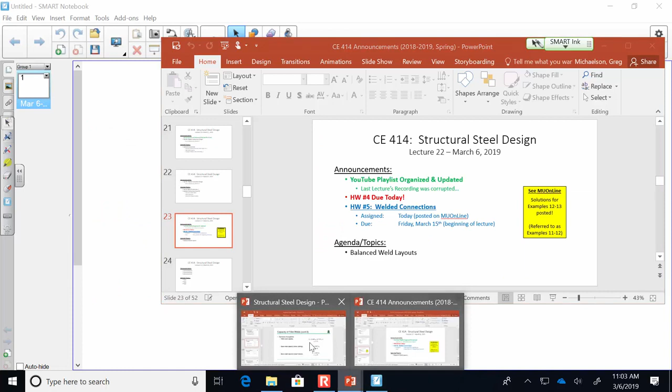Yeah, I know. Seriously, was everybody okay with last time? Did anybody have any questions? Everybody good? Okay, if you got any questions, please raise your hand. Don't be shy, I will be happy to address them.

So last time we started to, let me go back a few slides... here's a good place. All right, so we started to dig into the spec a little bit in regards to how to determine the capacity of a fillet weld. And we had gone through all of the math associated with the weld metal, the base metal. We had gone through defining the ultimate capacity of a connection according to the weld metal capacity.

So we said, all right, the phi value is 0.75. The material strength is 0.6 times the electrode capacity. And then the area is the length of the weld times the effective throat, so 0.707 times A, from just sine and cosine of 45 degrees. So the capacity was pretty straightforward.

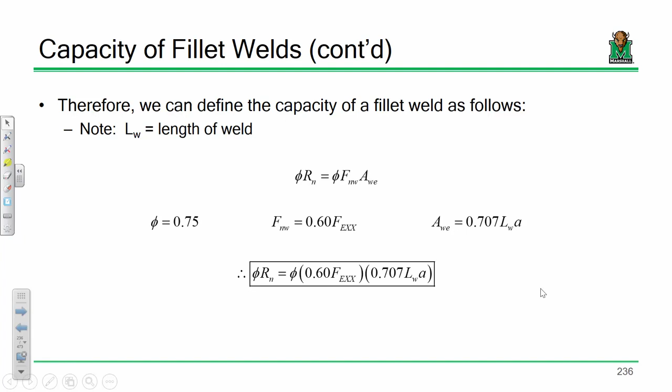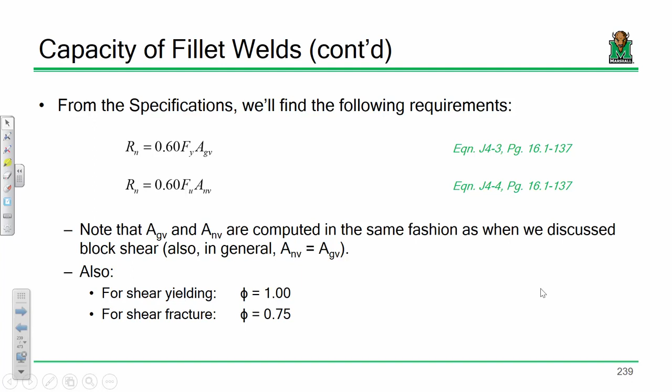The base metal, you end up going off of section J4, specifically J4-2, because we're assuming everything is in shear. So our capacity is just 0.6 Fy AGV and 0.6 FU Anv. It's very similar to the block shear computations. And remember, because we're talking about a welded connection and not a bolted connection, since we're not drilling holes or anything, the net area in shear equals the gross area in shear. We have our phi values listed, pretty straightforward.

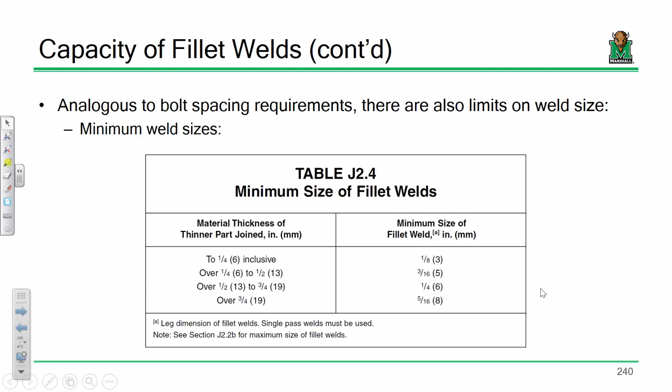We do have minimum and maximum weld sizes, for similar but different reasons than for bolted connections. For welded connections, we're worried about two things. We're worried about the heat sink phenomenon. So we have a minimum size of welds listed because if the weld gets too small, if you have a super thick plate and a really tiny weld, you get that heat sink phenomenon, where the plate absorbs the heat really rapidly, and you get a rapidly cooled weld.

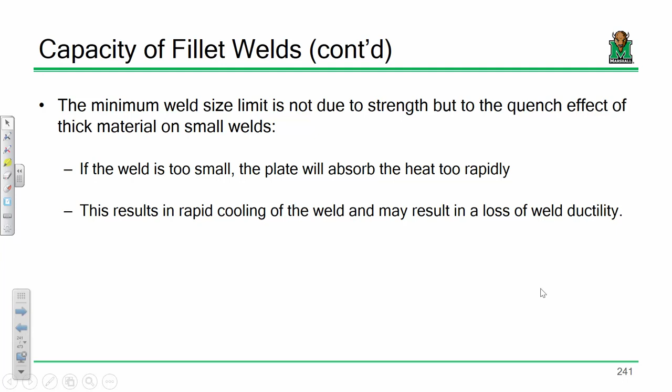It gets pretty brittle, and it doesn't behave properly, so we have a minimum weld size limit for that heat sink phenomenon. The maximum weld size limit is essentially to maintain this — if you have what I'd call a regular plate, the maximum weld size is usually backed off 1/16 of an inch, because we want to avoid melting that corner tip of the plate as we're placing the weld.

Now, if we have a really thin plate, something less than 1/4 inch thick, don't worry about it—go ahead and melt it. It's not really going to matter anyways. So that's our reasoning for weld limits.

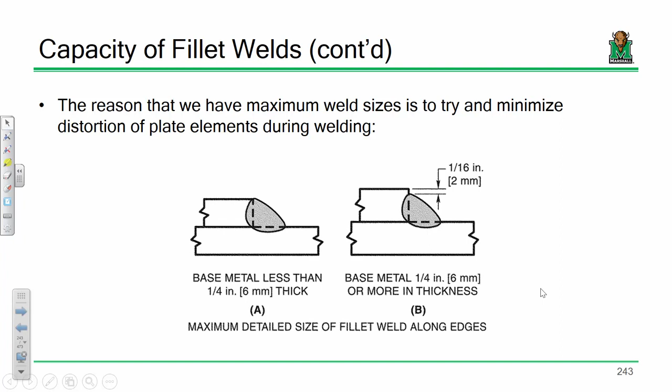Minimums are to prevent the heat sink phenomenon, and maximums are to maintain the geometry of the plate—make sure it remains a rectangular plate. I did mention weld limits on length, but that's usually not an issue for most of the welds we're placing.

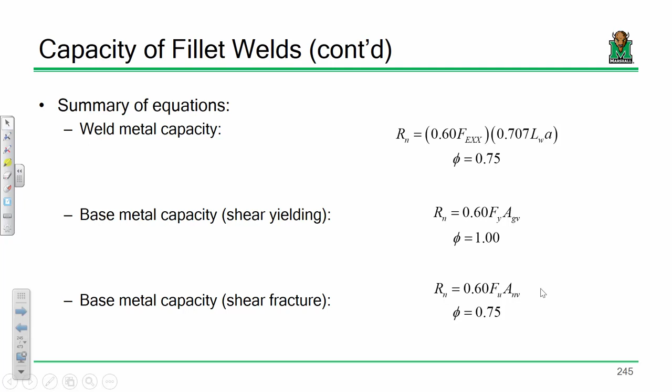So we got this very concise summary of equations: this is the weld metal capacity, base metal shear yielding, base metal shear fracture. We have our minimum weld sizes that we look up, and our maximum weld size is either the thickness or the thickness minus the 16th. Most times it's going to be the thickness minus the 16th.

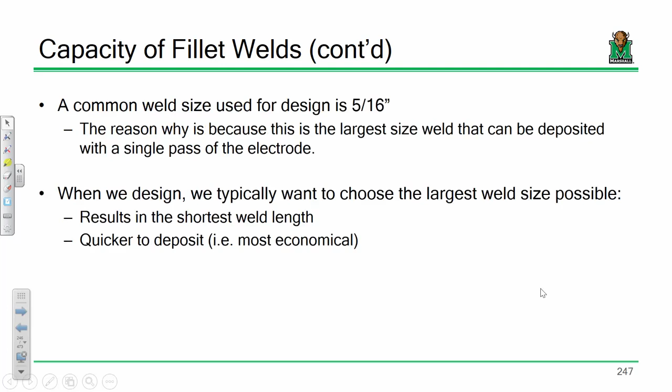We did two examples: one was an analysis example and one was a design example. In the design process, it's pretty straightforward—you just determine the capacity of an inch of weld and divide the load by it to determine the total number of inches.

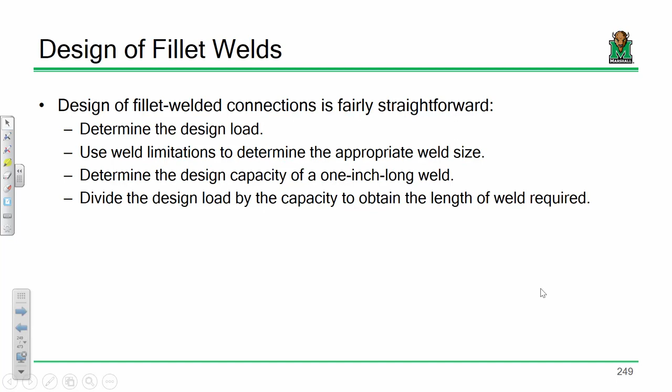That's basically it. The only other thing is that usually in design mode you have to determine your weld size, and more often than not you want to choose the maximum weld size. Maximum weld size means shortest weld length, so that's typically the most economical. When choosing a weld size, you usually want the biggest one you can, but you don't want to go over 5/16.

The reason is 5/16 is about the largest weld size you can place with a single pass of your electrode. Now, if you've got a lot of load and need a bigger weld, then you just need a bigger weld. But usually we can get by with 5/16 or less, depending on your weld limits. So 5/16 is a very common weld size because of that.

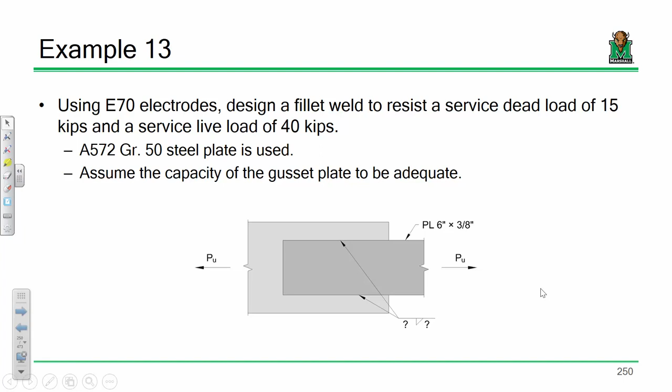Okay, now this was the example we did last time. When we did the math, we ended up solving for a weld length of something like 11.8 inches. Was it something like that? Is that what we got? I don't remember—what was the number?

11.78, so we rounded it up to 12 inches, and what we did is said, well, this is a plate, so let's just put 6 inches up here, 6 inches down here, let's call it a day. I think that made sense—if you've got 12 inches, just do half and half.

But why? Why would we split it up half and half? Why don't we just put 12 inches up top and nothing down below? Is there any reason not to? Well, yeah, there is a reason not to.

The reason is, think of it like a beam. I'm yanking on this plate with—what was the force on this problem? It was like 80-something, because there was a dead load and a live load. We factored it—what did we get? 82 kips. So I'm placing 82,000 pounds on this plate.

The analogy I think of is this: imagine I've got 82,000 pounds sitting in the middle of this table—half of it goes here and half goes here, right? So wouldn't it make sense that if I'm placing weld, I'd place half my weld over here and half over here?

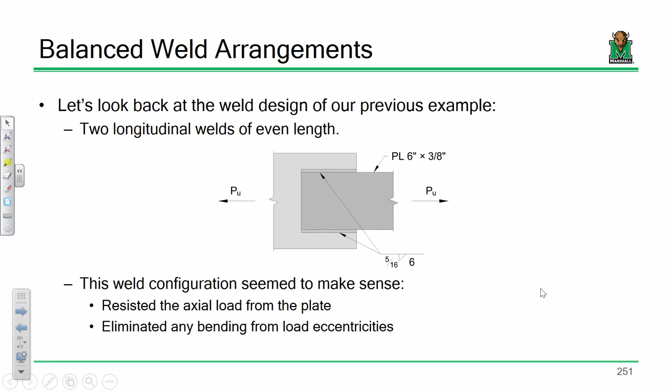But what about if the member is not symmetric? What if you have a member that's something like an angle? An angle does not exhibit symmetry up and down, because if you have an angle like an L 8 by 8 by 1, the centroid is not 4 inches down. It's whatever X bar and Y bar is. Because of that, the configuration and the way that you place welds is not as simple as just half and half. We have to place those welds in a certain fashion in order to eliminate bending moments.

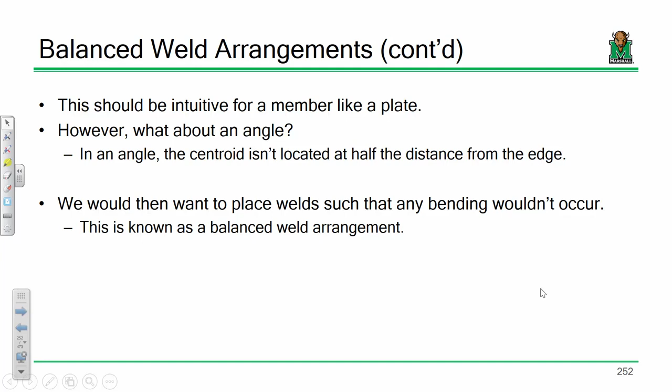So what I want to show you today is how to place a balanced weld arrangement. I think you're going to find this is pretty straightforward when you get into it. And we're going to look at the following example.

So I have a connection. A lot of this is going to feel like a repeat of what we did in the last example, but what we do at the end is going to be pretty new. I have an angle affixed to a gusset plate.

And we'll say that it's A572 grade 50 steel throughout. And when I have this note here, I say assume the capacity of the gusset plate to be adequate. That just means for the sake of this problem, I'm really ignoring the gusset plate, and all I'm doing is looking at the angle.

So what I have here is an angle. It's a 6 by 4 by 3/8 inch angle, and I'm going to design balanced fillet welds to resist this angle. So let's go through this step by step.

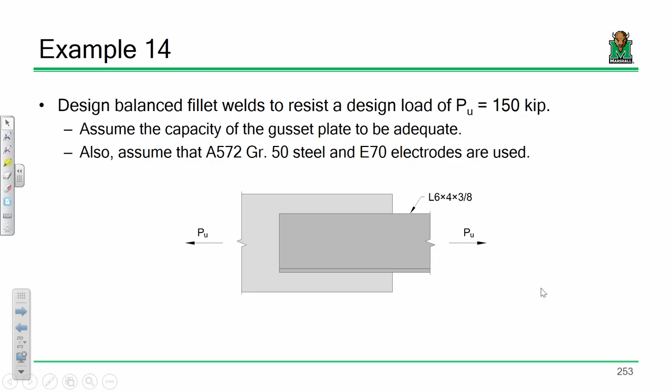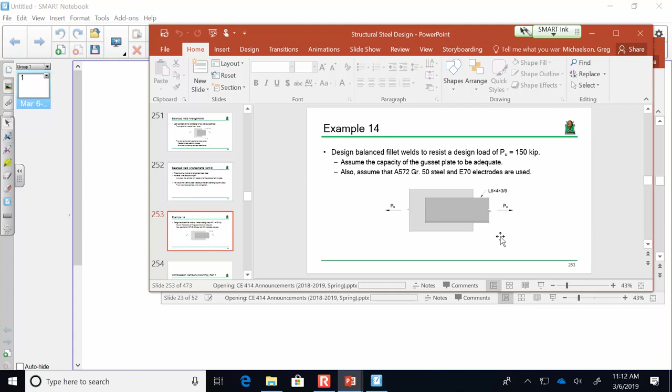And I think you'll see how this is a pretty straightforward problem once you get into it. Once we do this problem, I think you'll see how we arranged the welds in our previous problem not only just seemed to make sense, but it would follow along this pattern as well. So let's dive right into it.

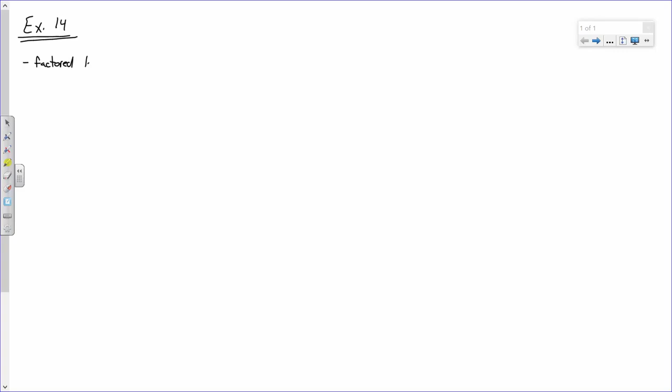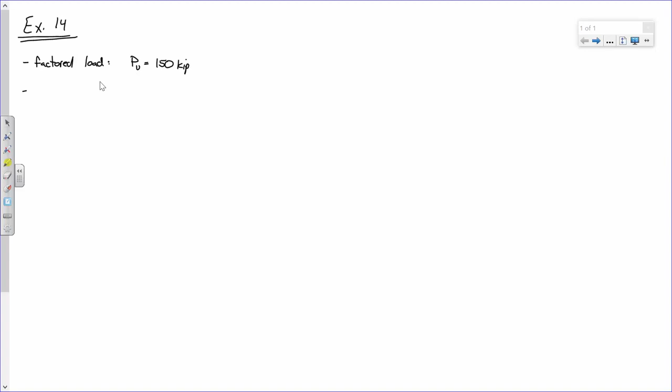Okay, so first off, we're designing this connection to withstand a factored load of PU is 150 kips. Do I need to factor that or anything? No, it's already been factored. If I had given you a service dead load and a service live load, then you'd need to factor it. Okay, now let's look at material properties.

First off, we were given E70 electrodes, so that means that FEXX is 70 KSI, just the number. And we were also given A572 grade 50 steel.

So we have FY and FU are what? It's going to be 50 KSI, this is 65 KSI. Okay, is everybody okay with that? I don't want to go too fast.

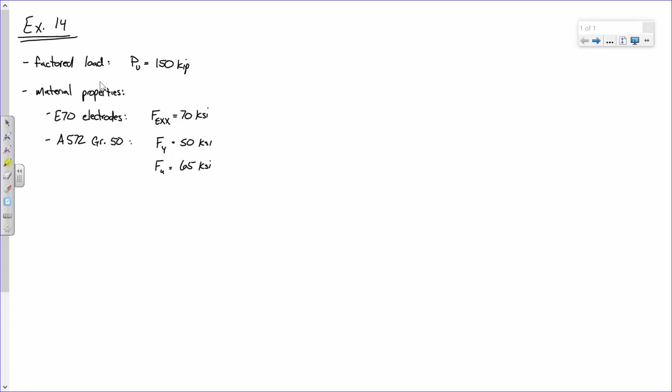Now, in order to design a welded connection, basically what we're trying to do is determine the capacity of an inch of weld. But in order to determine the capacity of an inch of weld, we need to know how big the actual weld size is. Remember, a weld is sort of like a triangular cross-section, and so we need to know the size of that weld. So what we're going to do is go to our weld limits.

In order to try and determine a minimum weld size and a maximum weld size. Now let's start off with A min. What is A min going to be for this section? First off, can you calculate A min? No, A min is a lookup. Okay, you're saying 3/16 of an inch. So first off, where did you get that?

So everybody should have their AISC 15th edition steel construction manual with them at all times when they're in CE 414 structural steel design here at Marshall University, right? And so we're in table J2.4.

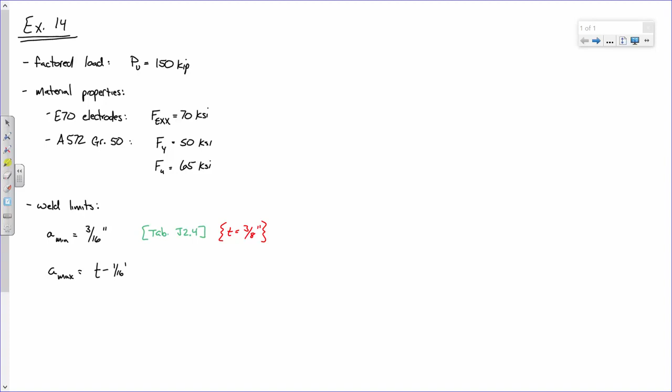The plate is definitely thicker than 1/4 of an inch, so that is the thickness minus a 16th of an inch. So that is 3/8 minus a 16th. 3/8 is 6/16, 6/16 minus 1 is 5/16 of an inch.

So you have an A min and an A max. Typically, when you're selecting weld sizes, do you lean towards the minimum weld size or the maximum weld size? Maximum. A larger weld size means a shorter weld length, and generally a shorter weld length is more economical. So when you're choosing weld sizes, you want to get as close to 5/16 without going over.

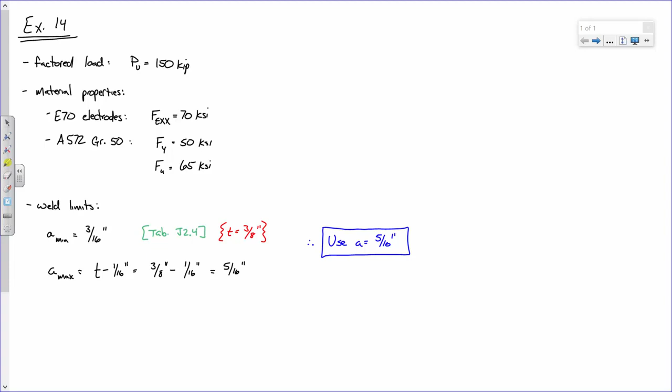Can we choose 5/16? Yeah, okay, so therefore use A is 5/16. Okay, everybody good?

Now we're going to take this one step at a time.

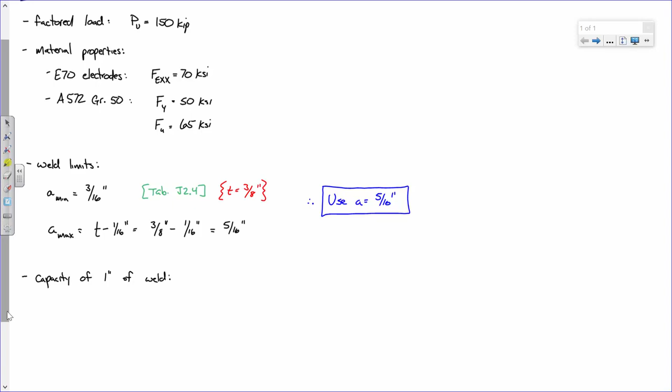Capacity of 1 inch of weld. So what parameters do we know? We know that FEXX is 70 KSI. We know that A is 5/16. We know that the length of weld is going to be 1 inch, assuming for the sake of discussion that the length of the weld is 1 inch. We know that Fy is 50 KSI, Fu is 65 KSI, and the thickness is 3/8.

So before we start computing capacities, is there anything that we can compute right now? If we know the length of the weld, since we're saying it's 1 inch, and we know the thickness, what can we compute? We can compute the gross area in shear, and we can also compute the net area in shear. So AGV equals ANV because we're talking about a weld, we're not drilling through the plate, so we don't have to remove material to create a connection. So that's just LW times the thickness.

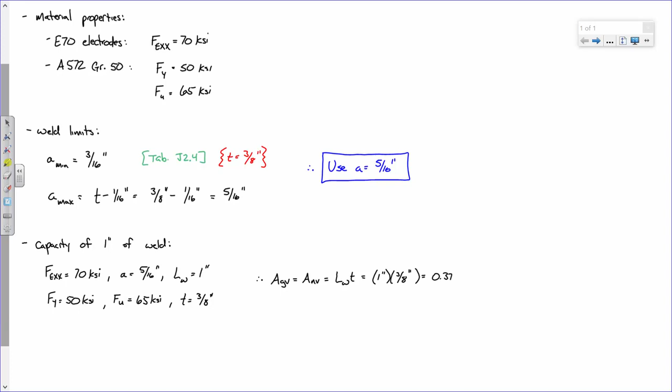So 1 inch times 3/8, that's 0.375 square inches. Sound good? All right.

For the weld metal, we have phi RN equals phi times 0.60 FEXX times 0.707 A LW. Do I need to fill all this in? I mean, we have all the values. Remind me, what's phi for the weld metal capacity?

It is 0.75. So can I just have you all tell me what this is? We have 0.75, 0.6, this is 70, this is 5/16, and that's 1. So tell me what you get. 6.96. Do I have a second on that?

If you need me to wait a little bit, that's fine. Everybody good? Okay, all right. So this is 6.96 kips per inch, and I say kips per inch, even though the units don't really work out that way, but I'm saying kips per inch to indicate that that is the capacity per inch of weld.

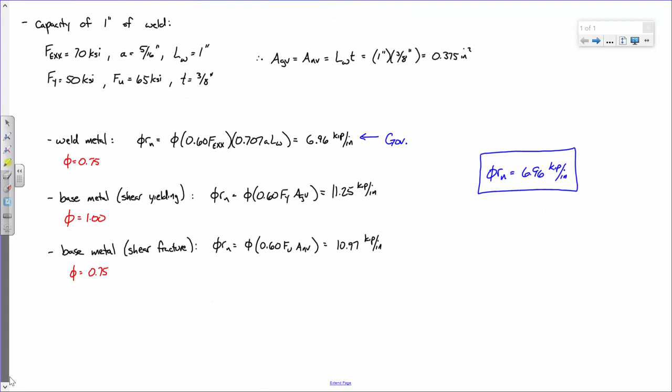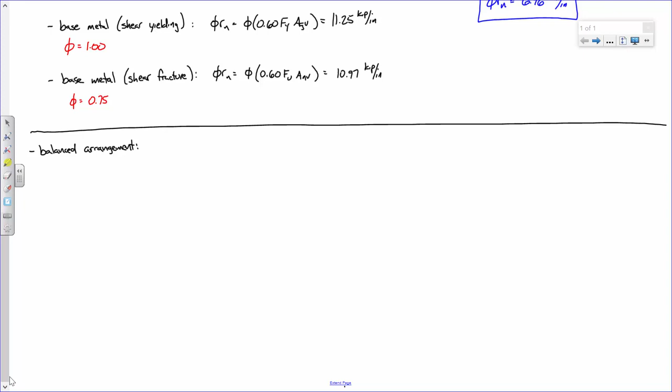Here's the new stuff. Balanced arrangement. Okay, got a little bit ahead of me.

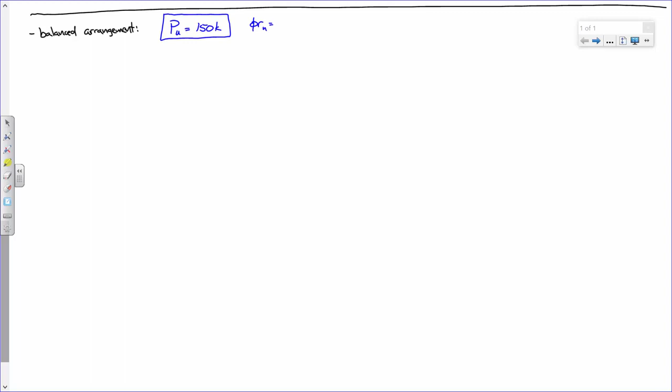Okay, now, in order to lay out this balanced arrangement, I'm going to put two numbers up top. I'm going to say PU is 150 kips. And I'm going to put phi RN is 6.96 kips per inch.

You don't have to rewrite them if you don't want to. I'm just putting them on my screen so that they're there. Okay. Let's draw some things out.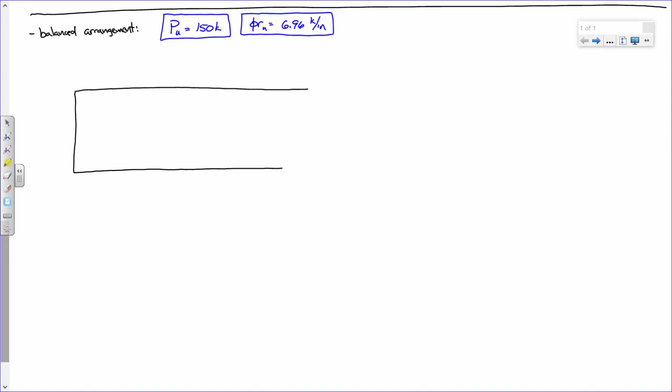Now, I have an angle that looks something like this. Okay? And I have a line that goes something like this. Okay, here, let me move that over a bit. Okay.

Now, I'm looking at this angle on the side. If I look at it, what does the angle really look like - like a samurai sword or lightsaber if you're a sci-fi fan? In a cross-section perspective it looks like this. Okay, let me redraw that a little bit. Say it's like that. Okay.

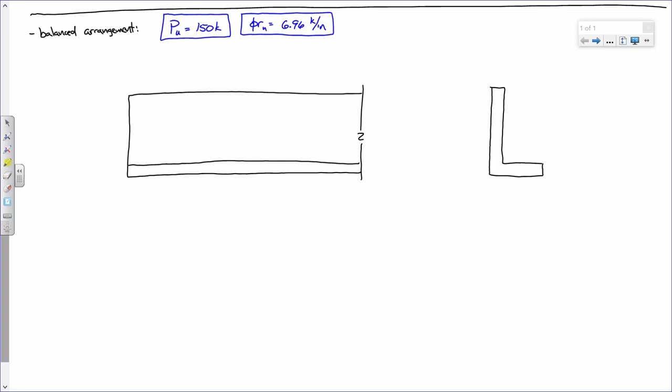So what I mean by that is this is 4 inches. And this is 6 inches. Okay? So this dimension here, so that everybody's clear, that is 6 inches.

Now, I have a question for you. How far is it from the bottom of this angle to the centroid?

I want to know what this dimension is right there. How far is it from the bottom to the centroid? Now remember, just so everybody's clear - actually, let me do that another way. This is an L6 by 4 by 3/8. How far is it from the bottom to the centroid?

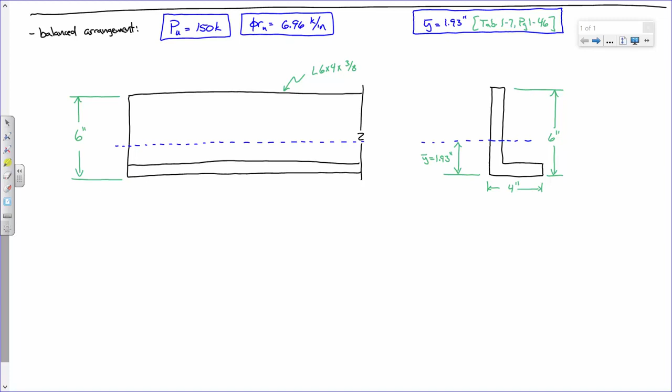Everybody with me? Okay. Now, here's the reason that we need the centroid. What we're doing in this problem is assuming that the load on this connection is going through the centroid - that when we yank on this angle with a load of 150 kips, we assume it goes through the centroid. Remember, when you use sigma equals P over A from Engineering 216 Mechanics of Deformable Bodies, you are assuming that those loads go through the centroid. If the load does not go through the centroid, not only are you generating axial load, but you're bending the section as well.

It's like if I have this backpack on my back and it's off to the side. Not only do I have to hold the backpack up, but I have to keep my back from tilting if the backpack's all the way over here. So the only way I can ensure I'm not being jerked over this way is if the backpack is going right along my center axis.

Make sense? Now the problem is this is 1.93 inches. So does everybody see how the load is closer to this side of the angle than it is to this side of the angle? Everybody see that?

So as a result, I propose that when we place weld, we're going to have more weld on this side than we are up here. That's what I mean by a balanced connection - we're going to have more weld on the bottom than on the top because the centroid is closer to the bottom than it is to the top.

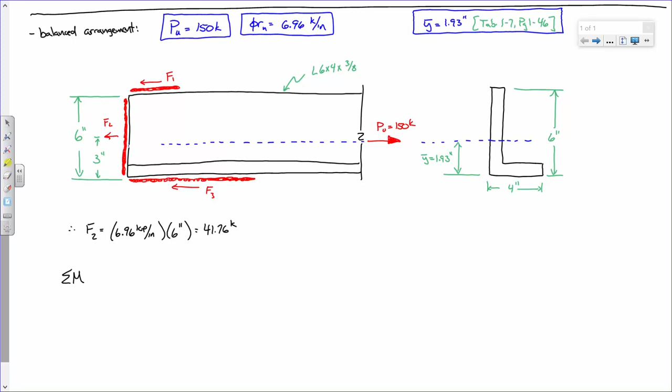I'm going to break out sum of moments equals 0. Specifically, sum of moments about the bottom. So you all know the drill. So what we're doing is summing moments about the bottom of the angle.

Okay, so we have 4 forces we need to consider. Let's start off with the forces going that way. Are there any forces going that way? PU, right? So about the bottom of the angle, are we rotating this way or this way? Do we belong on the left side or the right side? Left side. And from the bottom of the angle, how far are we? 1.93 inches. Or symbolically, we could say PU times Y bar.

Now, how many forces are going this way? 1, 2, 3 of them, right? Let's take each one at a time. What about F1? Which side does it go on, the left or the right? And what's that moment arm? There we go. What about F2? Is it on the right? And what's that moment arm? What about F3? What's its moment arm going to be? There we go.

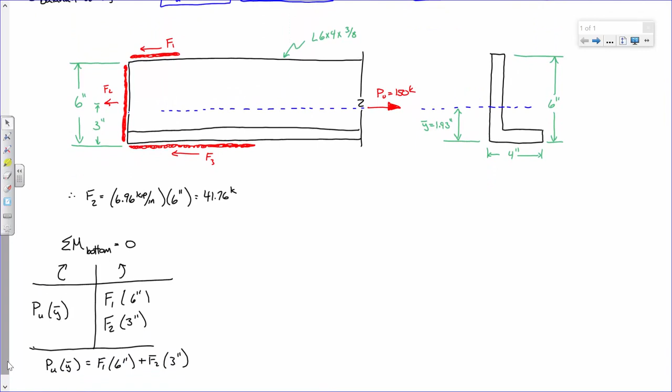So we have PU times Y bar equals F1 times 6 inches plus F2 times 3 inches, right? Let me squinch this up a bit.

All right, so therefore, what don't I know in this expression? What don't I know? F1. So what do we do? Let's put that F2 times 3 inches on the other end, divide by 6. F1 is PU times Y bar minus F2 times 3 inches, over 6 inches.

So, and so what does that come out to be? Say it again. 27.37 kips. Do I have a second on that?

Now, let me ask you this - how long does that weld need to be? How do I determine that? There you go. So therefore, we'll call that L1 is 27.37 kips over 6.96 kips per inch. And that equals what? Say it again.

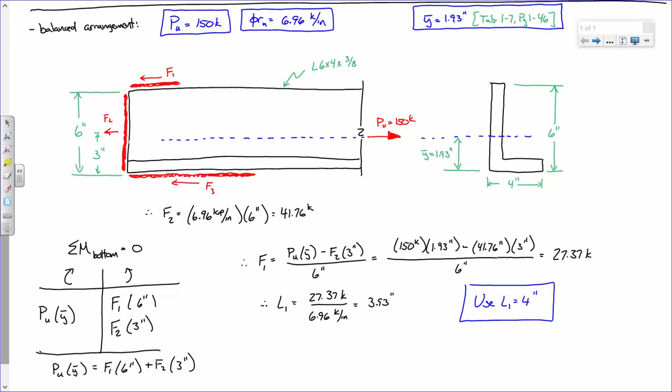There you go, sum of forces in the x direction. So if I just say, all right, let's sum forces in the x direction, I can just say that F3 is the force going to the right minus the remaining forces going to the left. And what do I get?

Then do the same thing. And that equals what? Sorry, that's L3, not L2.

Now, I was drawing the box. As I drew the box, I saw the mistake. Does that count? I'm going to say no. I know, it's skewed because I'm the one who keeps track of it.

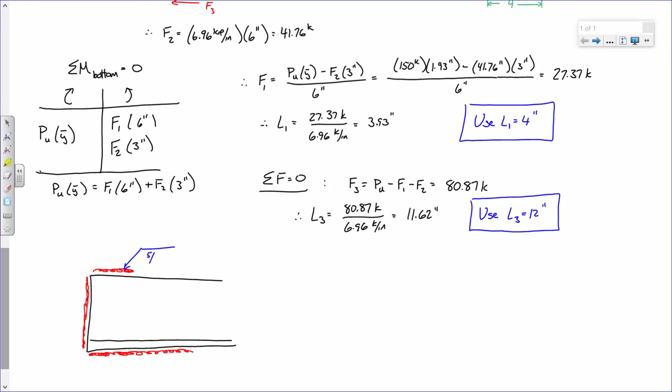All right, so to summarize this welded connection design, here's the angle. And so what you've got is, you don't actually have to draw the weld symbols or the actual weld, although I like to draw that out. We have that. We have that. We have that. And so this is 5/16, 4.

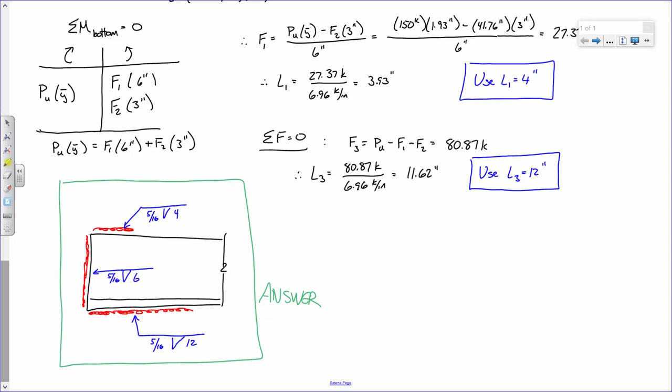Yes. Because typically, if you're going to place that, you're just going to weld around the whole thing. Yeah. So, yes.

Any other questions? Well, I have two things to say before we at least introduce our next topic. Number one, if you understood that, then your homework assignment should be a breeze. I'm not kidding. Two, that's exam 2. Because exam 2 is just on bolts and welds. That's it. There's a reason why exam 2 is only worth 15%, because it's just not on a lot.

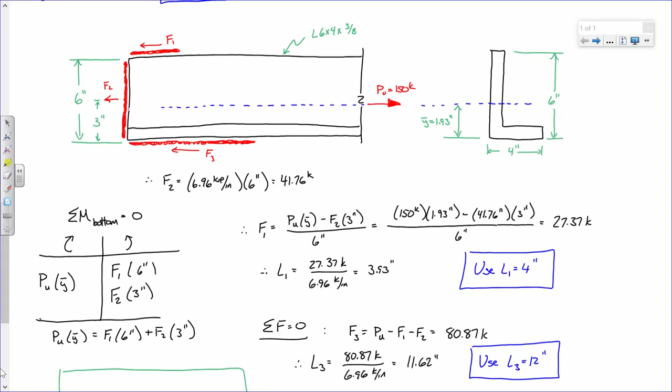All right, we're introducing this next topic though. Let me go say this. All right, so let's everybody pay attention. Are there any more questions on welds? Seriously? Then that's all I have to say about them because there really isn't much else to say.

It's pretty straightforward. There are some more advanced connection types that you can design, like if you have eccentrically loaded connections and things like that. But for regular old everyday purposes in a typical steel design course, that's it.

So we're going to move on and cover the first of our last two remaining topics, which are columns and beams. And I'll go ahead and tell you that things from here on out are going to get a little different in terms of how we design, the theories we consider, the math we look at. It's going to get a little different. What we do from here on out is going to be much more heavily dependent on design aids in the manual. It's not going to be like what we did just now where we could just solve for the weld length and then move on.

Yes? That's a good question, calculus. There'll be some calculus that shows up in the derivations, but not in the actual problems. So, what's that? Oh, God.

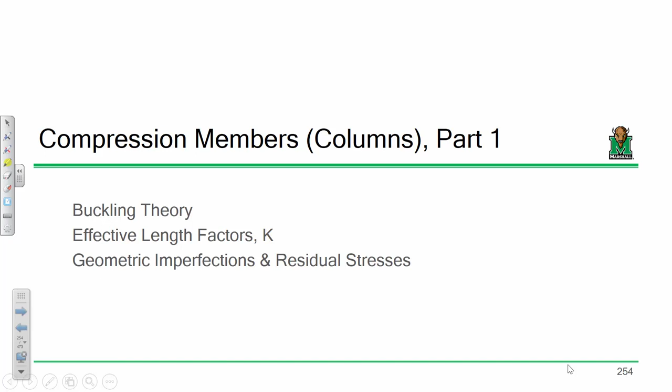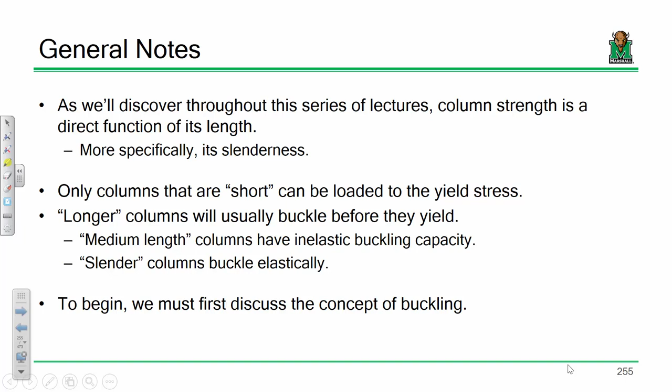All right, I want to talk about a concept that was discussed at the end of Engineering 216. I know it's still burned into your memory, but I'll recap. That's the concept of buckling. How many of you have heard of buckling? Hopefully. Okay, good. All right, so the idea behind buckling is this: when you take a member and you yank on it, you can yank on it all day long until you hit the yield stress.

Or the tensile stress or what have you, and there you go. But when you load something in compression, it's a little different. Imagine if I had a yardstick in my hands. I can yank on that yardstick all day long, but as soon as I take that yardstick and start pressing on it, it starts suddenly bowing, and it starts bowing very rapidly. You load and load and load, and then boom, it goes.

Now, how do you address that? Well, you address that through basically a whole different science in structural engineering, and it's a major topic that we have to assess: the idea of stability. And I would argue that stability is really going to become a main focus of this course for the rest of the semester, because whether we're looking at columns or beams, stability becomes a big deal.

Okay, now what we're going to do is this, and I'm going to save this and really get into it next time, but we have a column, a pin column, with a load on it. We're going to apply a load P, and we're going to ask, how much load would cause that column to buckle? What we're going to do is this.

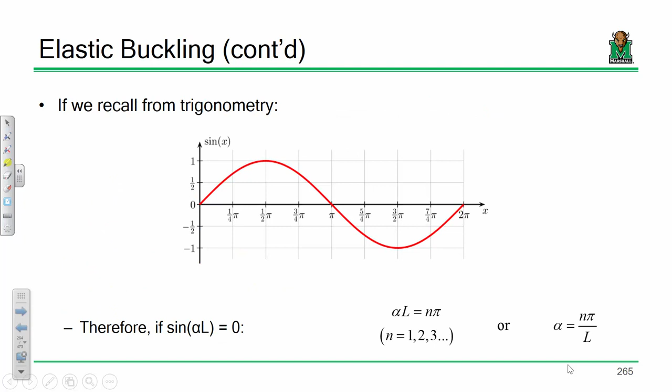We're going to go through all of the math associated with buckling, okay? I know if you've had me for mechanics of deformable bodies, we derive this at the end. If you haven't, I know you've seen it at some point, but at the very least, even if it's been a long time, you should remember a formula that looks something like this.

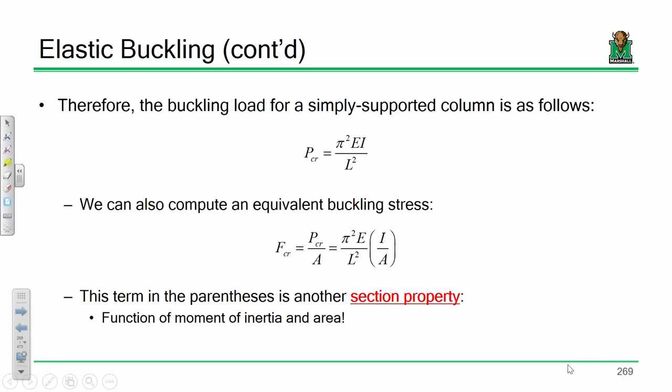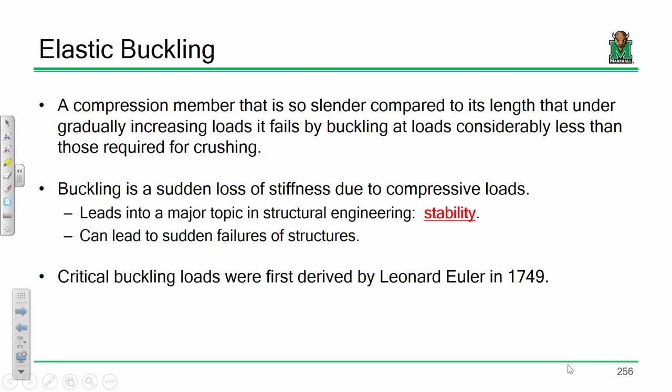I know it's been a while, but you should have seen it at some point. What we're going to do is this: I'm going to derive this formula for you. We'll walk through it together. And then what I'm going to do is tell you why that formula is wrong. Okay?

Now you're going, Dr. Mike, what are you talking about? Why are you wasting our time? Here's the reason. Elastic buckling is not in itself entirely correct, but it's useful. What we're going to do is ultimately use this formulation when we compute capacity, but there's two big reasons why elastic buckling, what you learned in 216, doesn't directly work for columns.

We're going to talk about that next time. Before we end, so I see everybody's like, yeah, Dr. Mike, but we're packing up because we got lunch to eat and all that.